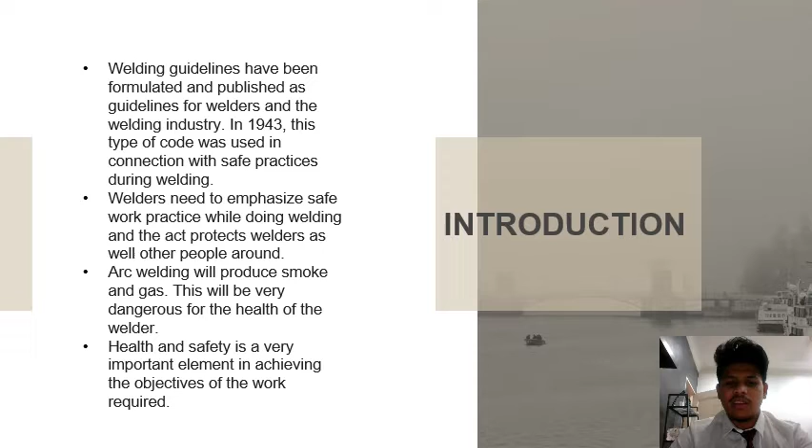Arc welding will produce smoke and gas, and it will be very dangerous for the health of the welder. Prolonged exposure to welding fume may cause lung damage and various types of cancer, including lung, larynx, and the urinary tract. Health effects from certain fumes may include metal fume fever, stomach ulcers, kidney damage, and nervous system damage. In conclusion, health and safety is a very important element in achieving the objectives of the work required.

For the problem statements, I had identified four problems that contribute to the need for producing the portable welding fumes extractor. The first problem is the difficulty in installing the ventilation system. It is caused by the air suction factor that is difficult to install, and it will cause the ventilation system to not occur in the workplace. This is due to the narrow and complex workspace that causes the vacuum cleaner to fail to be installed.

The second problem is to have a good ventilation system while doing the work. Having a good ventilation system is very necessary because it will remove the fumes from welding and it will protect the health of the welder. The third problem is the expensive cost and narrow workspace. The current fumes extractors are normally used in heavy industry such as factories. The size of the current fumes extractor is big and it costs a lot of money just to buy them. For small welding businesses, it will be a burden and they cannot afford to buy the fumes extractor.

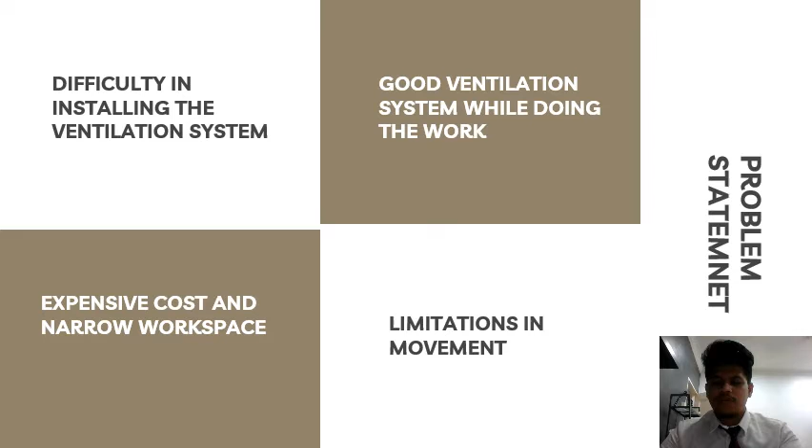The last problem is the limitation in movement. Because of the size of the welding fumes extractor and the hose of the fumes extractor is not long enough, it will limit the movement. For my project, I will add tires so that the portable fumes extractor can be moved freely.

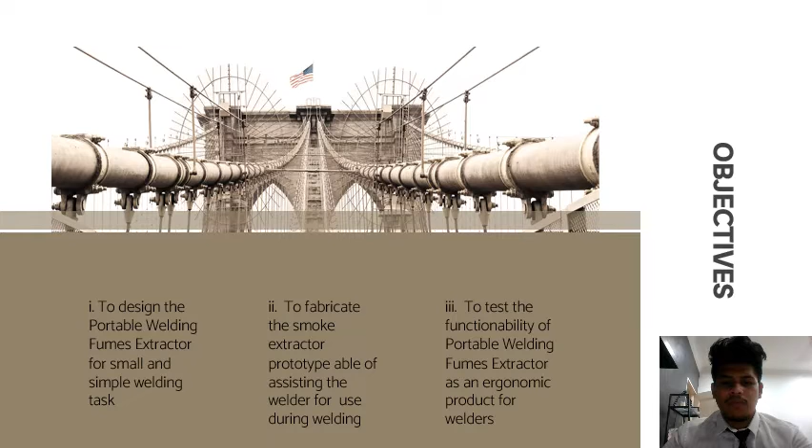For the objectives of my portable welding fumes extractor, I have three objectives. The first one is to design the portable welding fumes extractor for small and simple welding tasks. The portable welding fumes extractor will be very useful, especially for small welding businesses, to help them do welding work at their place. The second objective is to fabricate the smoke extractor prototype that is able to assist the welder during welding. And the last objective is to test the functionality of the portable welding fumes extractor as an ergonomic product for welders. Next is the scope of study. For my portable welding fumes extractor, I have three scopes of study.

The first one is the implementation from the aspect of safety and health of the welder during the welding. In this project, I focus more on this aspect because welders are exposed to danger while they are welding. It is because the welding fumes can affect the health of the welders. Prolonged exposure to the welding fumes can cause long-term health issues for the welders.

The second scope of study is focused on welders who work in small-scale workshops and welding sites. This project will provide small-scale welding businesses with a product that is very beneficial and can protect them while they are welding. And the last scope of study is the functionality of the equipment used by the welder during the welding. In order for me to create an ergonomic product for welders, I have to make sure that the product that I have produced functions well.

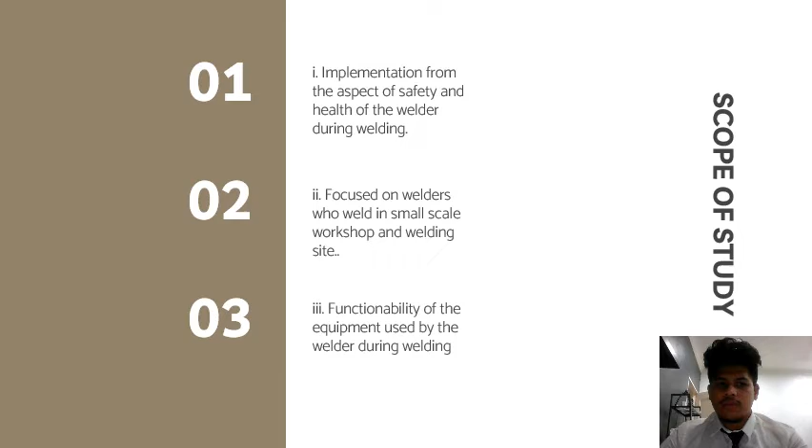For the literature review, I had done some research by reading and searching some journals and books in order to help me with my final year project. From the research that I had made, I had identified three subtopics that can help me with my final year project. The first subtopic is about welding smoke absorbers.

According to Examiner and Ryan 2000, smoke absorbers during the welding process are an important element during the welding. Every welding process must have a smoke extractor to create rotation of the air in the workplace. This is because the smoke emitted during the welding has particles that can adversely affect the welder. Therefore, smoke inhalers are an important thing to remove harmful welding fumes from welders.

According to him again, a spacious workplace as well as good ventilation are essential to remove welding fumes and gases. If the smoke inhaler is not working properly, then the smoke and gas cannot be removed from the workplace. This can cause harm to the welder. Another method that can be used to replace a smoke inhaler is by using approved respiratory equipment.

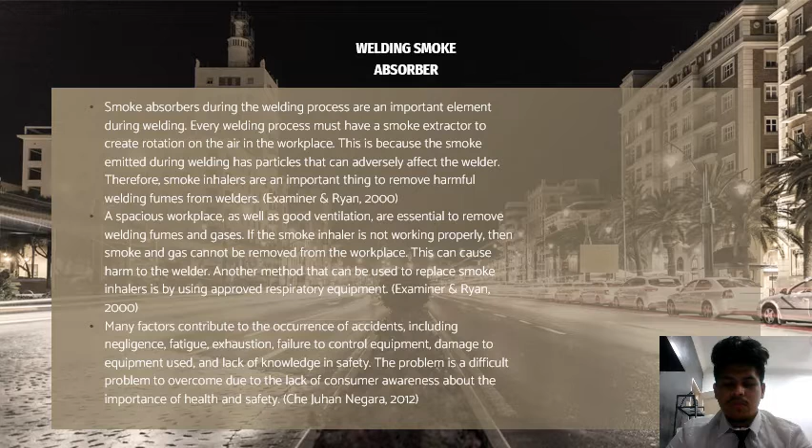According to Che Juhan Negara 2012, many factors contribute to the occurrence of accidents, including negligence, fatigue, exhaustion, failure to control equipment, damage to equipment used, and lack of knowledge in safety. The problem is difficult to overcome due to the lack of consumer awareness about the importance of health and safety.

The next topic is on welding smoke effect on the welder. According to Kearns 1978, arc welding will produce smoke and gas. The gas is very dangerous to the health of the welder. Smoke resulting from the welding process can lower the oxygen level of the welder, causing the welder to suffer from shortness of breath and even death. According to Zoalfakar and Hassan 2017, welding work that emits welding fumes can adversely affect the welder, especially their respiratory as well as physical parts.

Ultraviolet radiation is radiation generated from electricity resulting from the welding process. UV radiation has a very strong effect on users, especially on the eyes, even with the use of eye protection. The eye effects resulting from this UV radiation can be seen over a long period. In addition, this UV radiation can also harm the exposed skin of the welder.

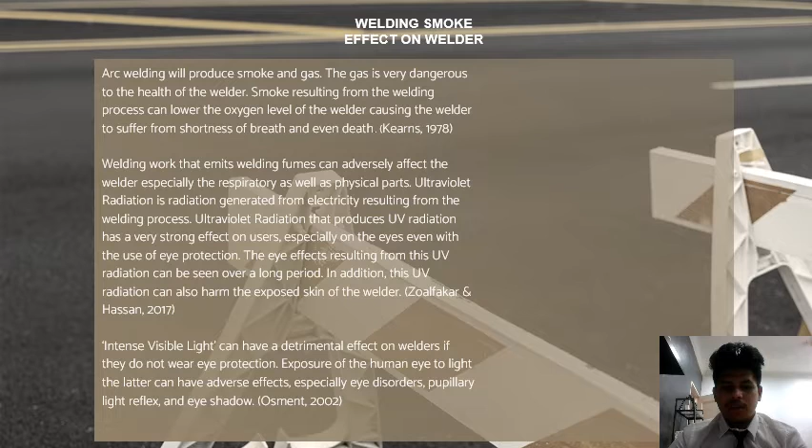According to Osment 2002, intense visible light can have a detrimental effect on welders if they do not wear eye protection. Exposure of the human eye to the light can have adverse effects, especially eye disorders, pupillary light reflex, and eye shadows.

The last subtopic is about the problem of lack of smoke absorbers during welding. According to the Department of Occupational Safety and Health 2014, the use of smoke extractors among small to medium industries is very low nowadays. This is because the industry feels the use of smoke extractors in workshops is not important. According to the Occupational Safety and Health Act 1994,

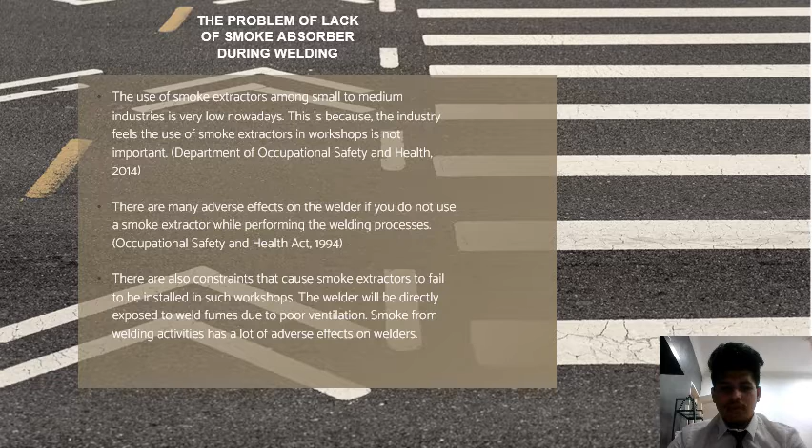there are many adverse effects on the welder if you do not use a smoke extractor while performing the welding process. There are also constraints that cause smoke extractors to fail to be installed in such workshops. The welder will be directly exposed to weld fumes due to poor ventilation. Smoke from the welding activities has a lot of adverse effects on welders.

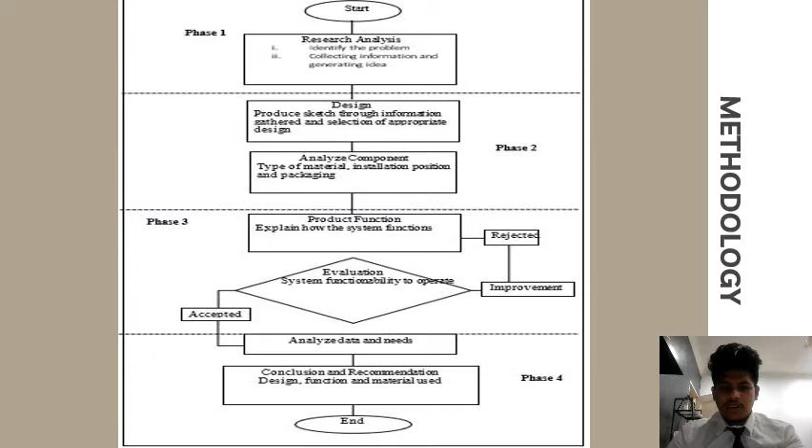After that, the component will be analyzed, such as type of material, installation position, and packaging. In phase 3, the product function will be explained. If it gets rejected, improvement will be made, and after that, evaluation will be made to check whether it will be accepted or not. If the product is accepted, the data and needs will be analyzed, and lastly, conclusion and recommendation will be made based on the design, function, and material used.

For my portable welding fumes extractor, I had created a Pugh chart to help me to select a design for my product. The picture is created based on the information gained from the literature review. Based on the information gathered, I came up with 3 proposed designs, and I compared all of them in the Pugh chart. Score will be given to each design based on the characteristic and the suitability.

These are 3 proposed designs that I came out with for my portable welding fumes extractor. The designs were created based on the information gathered from the literature review. The first design is design A. Design A consists of hose, S-section body, suction head, 230 volt powered motor, body and tires holder, and tires. Design B consists of 230 volt powered motor, S-section body, S-section head, S-section foot, S-section tail.

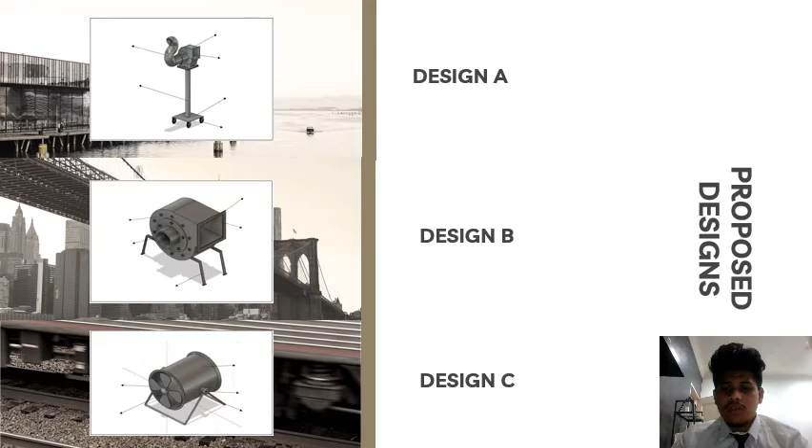And the last design is design C. Design C consists of S-section body, 230 volt powered motor, hollow steel feet, and exhaust fan. This is the Pugh chart for my project. As we can see in this Pugh chart, the 3 designs, design A, design B, and design C, are being compared. The score will be given based on its criteria.

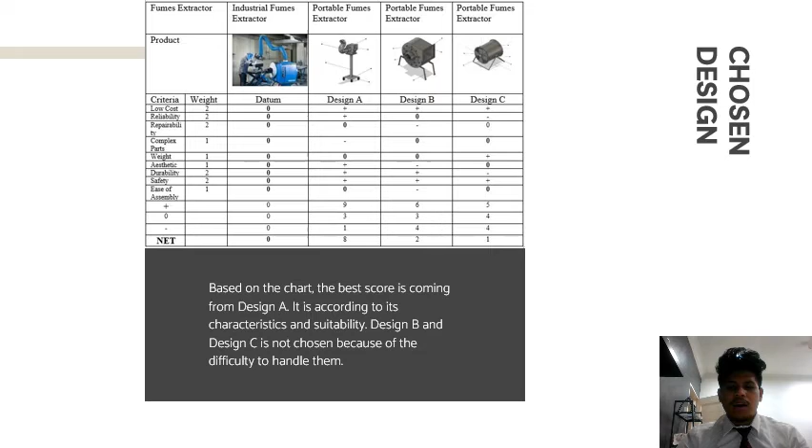Based on the chart, the best score is coming from design A. It is according to its characteristic and suitability. Design B and design C are not chosen because of the difficulty to handle them. So, for my product, the chosen design is design A. This is the chosen design for my product, which is design A.

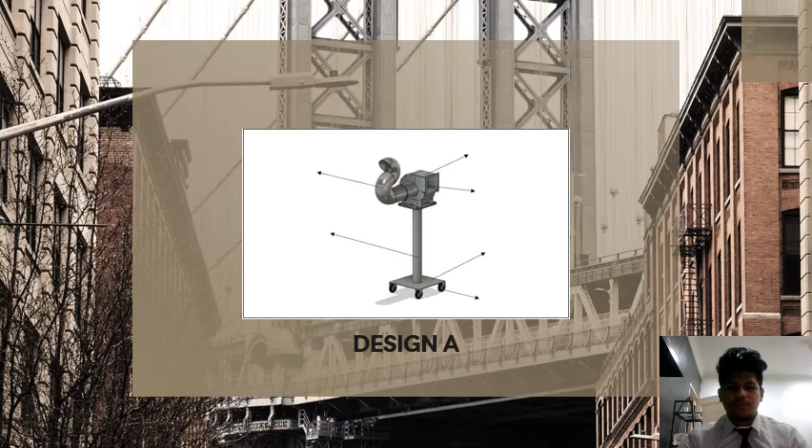The characteristics of design A. Design A uses electrical power on a 230 volt powered motor as a smoke extractor. The air suction motor has 2 types, namely single phase or 3-phase. In design A, there is a hose used to remove weld fumes from the welding workplace. Design A also uses heavy-duty type tires to facilitate movement from one place to another. The body on design A has an adjustment for the welder to raise or lower the exhaust body. And lastly, for the air suction system, power is channeled to a motor located in the middle of the body.

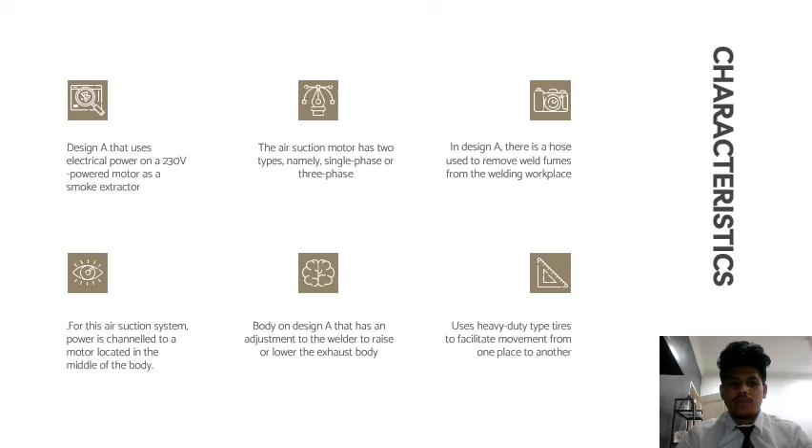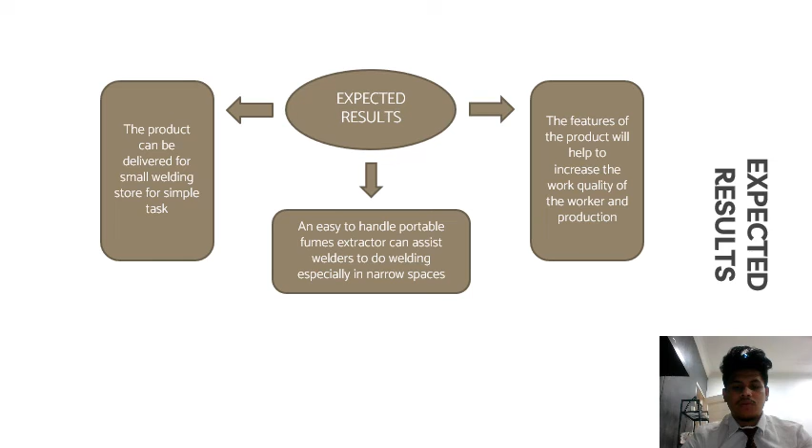Next is the expected result. Based on the ongoing process of my portable welding fumes extractor, I expect that my product can be delivered to small welding stores for simple tasks because they only have to spend low cost for the product. The next one is an easy to handle portable welding fumes extractor can assist welders to do welding, especially in narrow spaces due to its small size, and it can be installed at the welding place. And the last expected result is the features of the product will help to increase the work quality of the worker and the production.

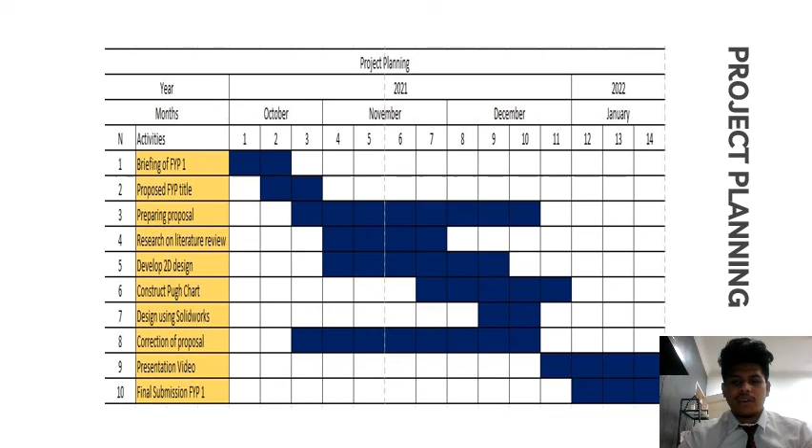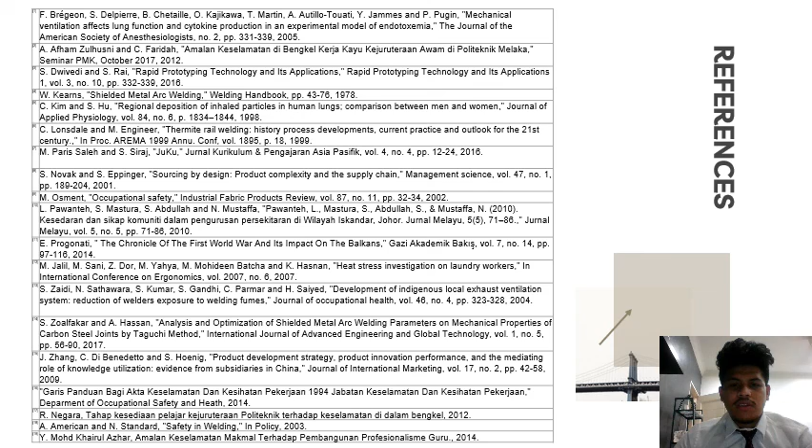This is the project planning, or we call Gantt chart, for my portable welding fumes extractor. As we can see, it took me 14 weeks to complete all the tasks for final year project 1 for this semester. For the references, these are all the books and journals that I had found and referred to for my portable welding fumes extractor. A total of 19 books and journals were found to assist me with my final year project.

The project summary for my portable welding fumes extractor: this project is about a fumes extractor to be utilized for small-scale welding businesses. In Malaysia especially, the small-scale welding operators are not very cautious about the safety and health issues pertaining to welding fumes. It can also be used to weld in complex and narrow spaces. This project aims to propose a user-friendly and portable fumes extractor.